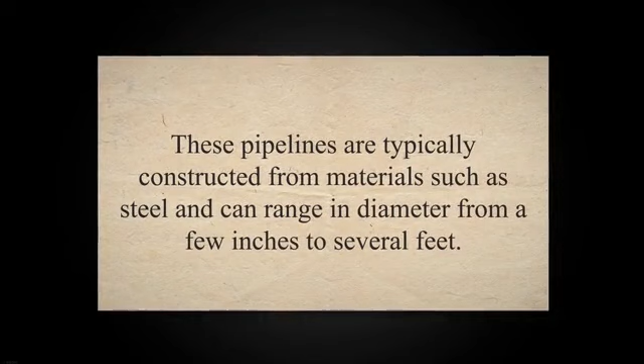A cross-country pipeline is a large network of pipes used to transport liquids or gases over long distances, typically between cities, countries, or continents. These pipelines are typically constructed from materials such as steel and can range in diameter from a few inches to several feet.

Cross-country pipelines are used to transport a variety of substances, including crude oil, natural gas, refined petroleum products, water, and chemicals. They are often used as a more cost-effective and environmentally friendly alternative to transporting these substances by truck, rail, or ship. The construction and operation of cross-country pipelines require significant planning, engineering, and regulatory approvals.

These pipelines must be designed to withstand the pressure and temperature changes that occur during transportation and must be monitored regularly for leaks or other safety concerns. Additionally, they must adhere to strict safety and environmental regulations to ensure the protection of people and the environment along the pipeline route. There are several examples of cross-country pipelines around the world.

Some notable examples include the Trans-Alaska Pipeline System, TAPS. The TAPS is an 800-mile pipeline that transports crude oil from Prudhoe Bay to the port of Valdez in Alaska. It was constructed in the 1970s and is one of the largest pipeline systems in the world.

Keystone Pipeline System. The Keystone Pipeline System is a 1,200-mile pipeline system that transports crude oil from Canada to refineries in the United States. It has been the subject of controversy due to environmental concerns and has faced multiple legal and regulatory challenges.

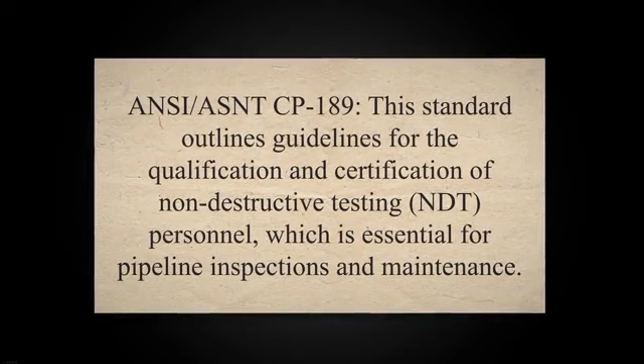ANSI/ASNT CP-189. This standard outlines guidelines for the qualification and certification of non-destructive testing (NDT) personnel, which is essential for pipeline inspections and maintenance.

API 1169. This code provides standards for the certification of pipeline inspectors and covers areas such as pipeline construction, operations, and maintenance. PHMSA Pipeline Safety Regulations. These are regulations published by the Pipeline and Hazardous Materials Safety Administration (PHMSA) in the United States that establish minimum safety standards for the design, construction, and operation of pipelines.

Compliance with these codes and standards is essential for the safe and reliable operation of cross-country pipelines. Pipeline operators are responsible for ensuring that their pipelines meet these requirements and are regularly inspected and maintained to ensure continued compliance. The design and construction of cross-country pipelines require careful planning, engineering, and regulatory approvals.

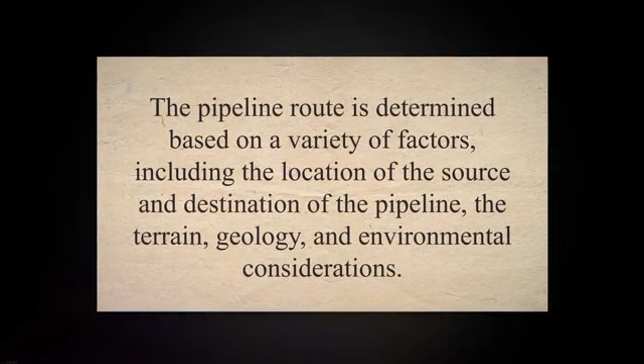The pipeline route is determined based on a variety of factors, including the location of the source and destination of the pipeline, the terrain, geology, and environmental considerations. The construction of a cross-country pipeline involves several phases, including surveying and planning. The pipeline route is surveyed and planned using topographical maps, geological surveys, and other data. Environmental, cultural, and community concerns are also considered during the planning process.

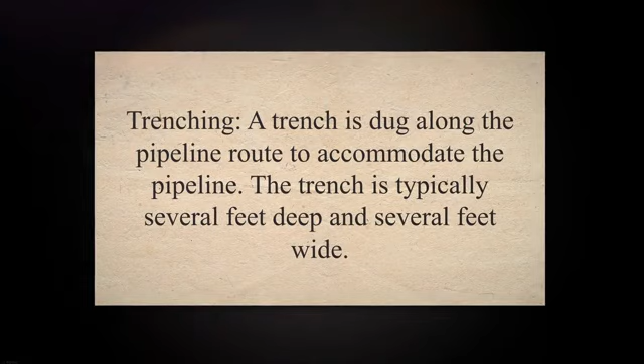Clearing and grading. The pipeline route is cleared of vegetation and other obstacles. The land is then graded to create a flat surface for the pipeline to be installed. Trenching. A trench is dug along the pipeline route to accommodate the pipeline. The trench is typically several feet deep and several feet wide.

Pipeline installation. The pipeline is installed in the trench and welded together to form a continuous length. The pipeline is then coated with a layer of protective material to prevent corrosion and other damage. Testing and commissioning. The pipeline is tested for leaks and other defects before being commissioned for operation.

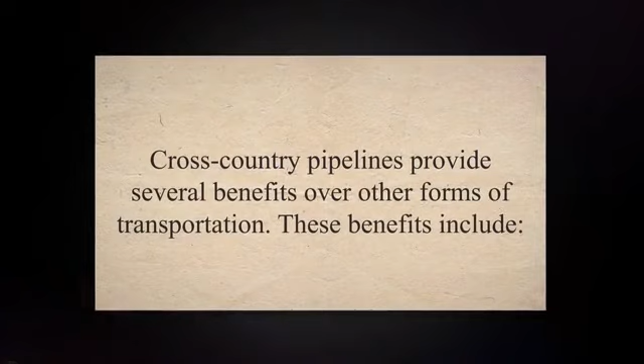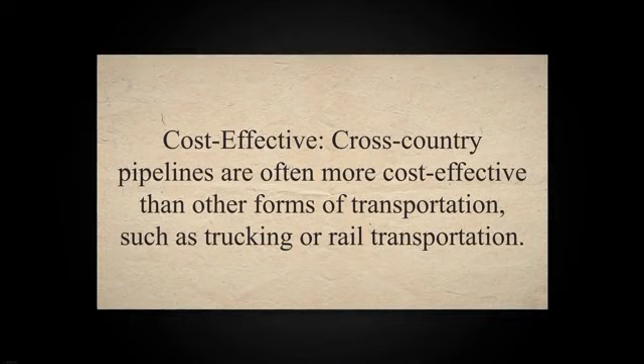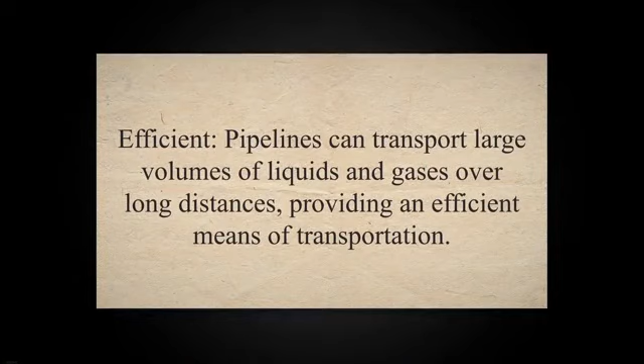Cross-country pipelines provide several benefits over other forms of transportation. These benefits include: Cost-effective. Cross-country pipelines are often more cost-effective than other forms of transportation, such as trucking or rail transportation. Efficient. Pipelines can transport large volumes of liquids and gases over long distances, providing an efficient means of transportation.

Safe. Pipelines are generally considered a safe means of transporting liquids and gases, with a lower risk of accidents compared to other forms of transportation. Environmental benefits. Pipelines are generally considered a more environmentally friendly means of transportation compared to other forms of transportation. Pipelines can reduce greenhouse gas emissions by reducing the need for trucking and other forms of transportation.

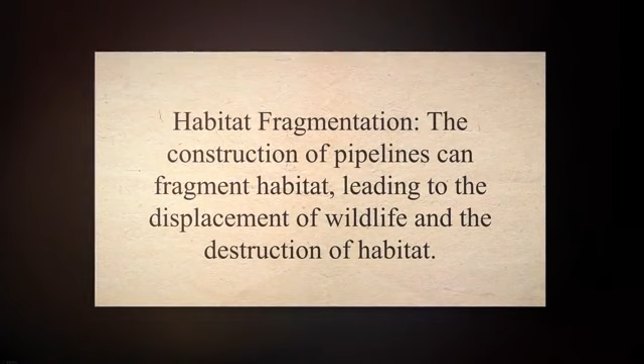The construction and operation of cross-country pipelines can have significant environmental impacts. These impacts include: Habitat fragmentation. The construction of pipelines can fragment habitat, leading to the displacement of wildlife and the destruction of habitat. Soil disturbance. The construction of pipelines can disturb the soil, leading to erosion and other environmental impacts.

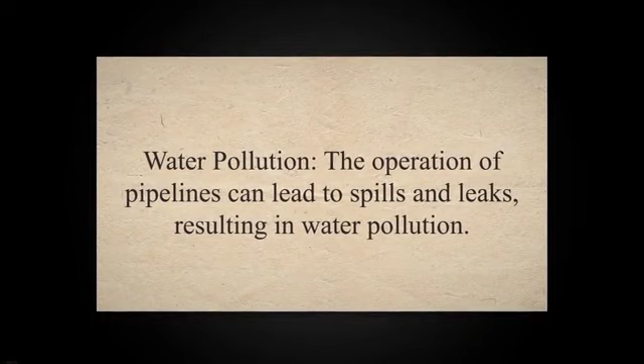Water pollution. The operation of pipelines can lead to spills and leaks, resulting in water pollution. Greenhouse gas emissions. The operation of pipelines can result in greenhouse gas emissions, contributing to climate change. Cross-country pipelines are an essential component of the energy and transportation infrastructure, providing a reliable and efficient means of transporting liquids and gases over long distances.

The design and construction of these pipelines require careful planning, engineering, and regulatory approvals to ensure their safe and efficient operation. While pipelines provide several benefits, they can also have significant environmental impacts that need to be carefully managed and mitigated. By balancing the benefits and environmental impacts of cross-country pipelines, we can ensure a sustainable and reliable energy and transportation infrastructure for future generations.